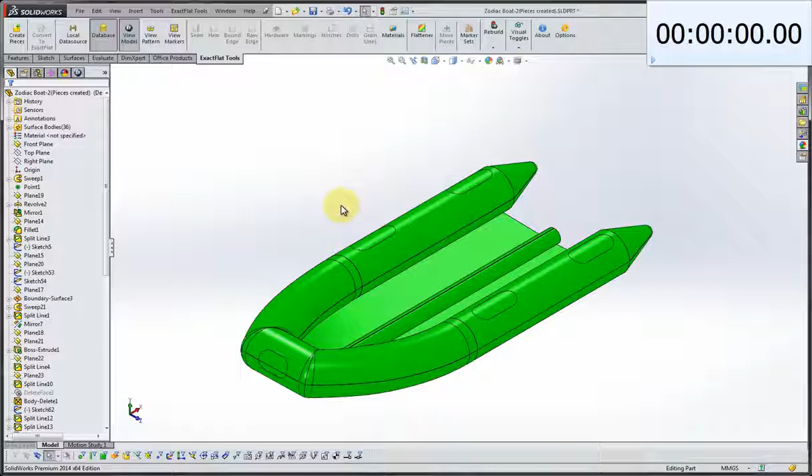In this example, we have an inflatable boat, a Zodiac type boat, which was modeled from scratch using SolidWorks 3D drawing tools that we are going to flatten in Exactflat. We've done a little bit of pre-processing work here. As you can see, we've already got our initial flat pattern, which for the developable surfaces should be fine. But we're going to go ahead through the process and optimize this.

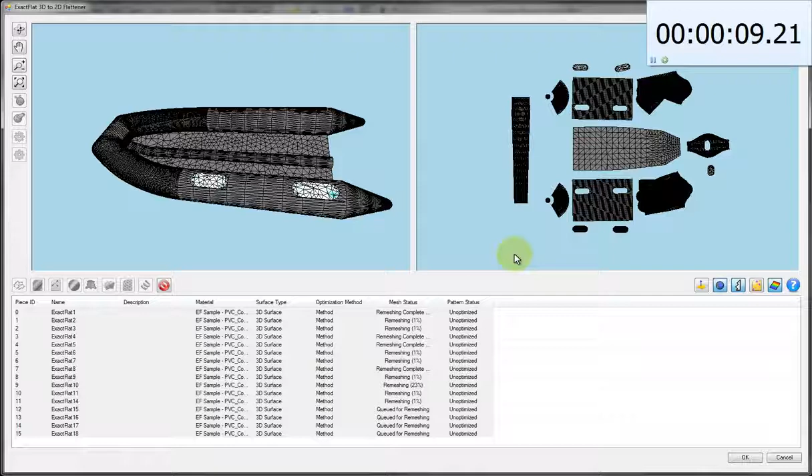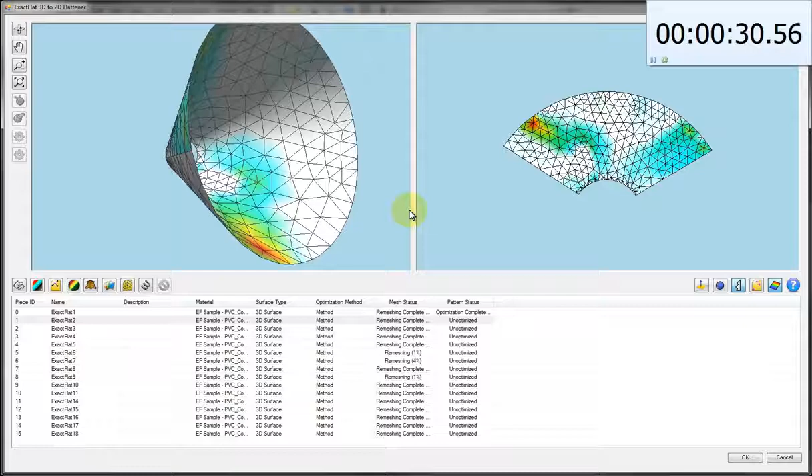We've got about 15 pieces here, and as we click on a remesher, we're going to get varying stages of completion for the meshing process. For those who are not familiar with the meshing process, the program creates an analysis mesh, which is optimized for our Exactflat 3D to 2D flattening algorithms. The meshing process is designed to reduce solve time and increase pattern accuracy.

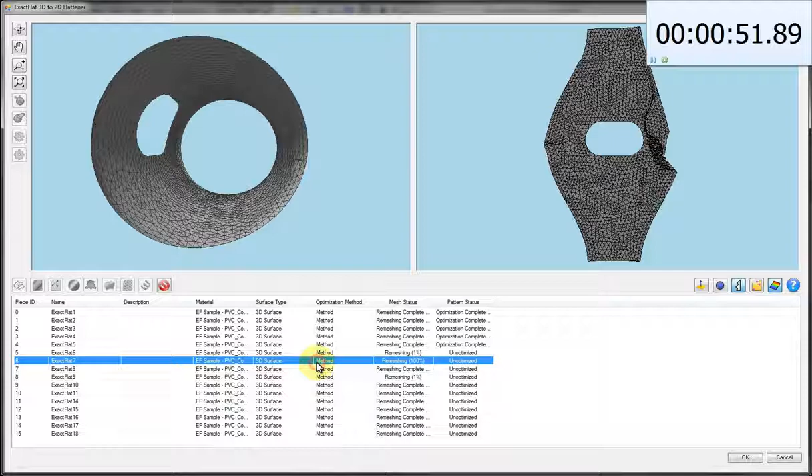You can see here that we're going to go through these individually. So as the individual pattern pieces are completed in terms of remeshing, we are then starting the optimizer on each one. We've got a couple of complicated pieces - you can see there's one that is still remeshing at a 1% level. But for those that are 100% complete, we'll just go ahead and start the optimization.

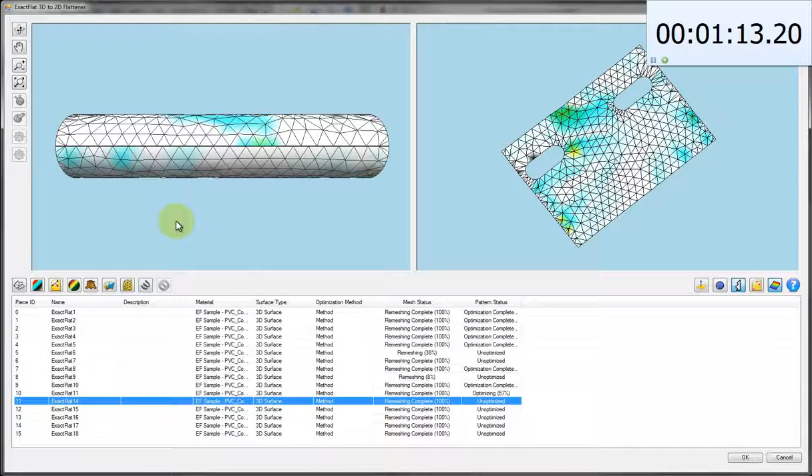You have a choice of letting the remeshing process run to completion for all the pieces and then optimizing the pattern geometry of the flattened pieces all at the same time. Or, as we're doing here, you can do it as the pieces become available from the remeshing algorithm. It depends on the complexity.

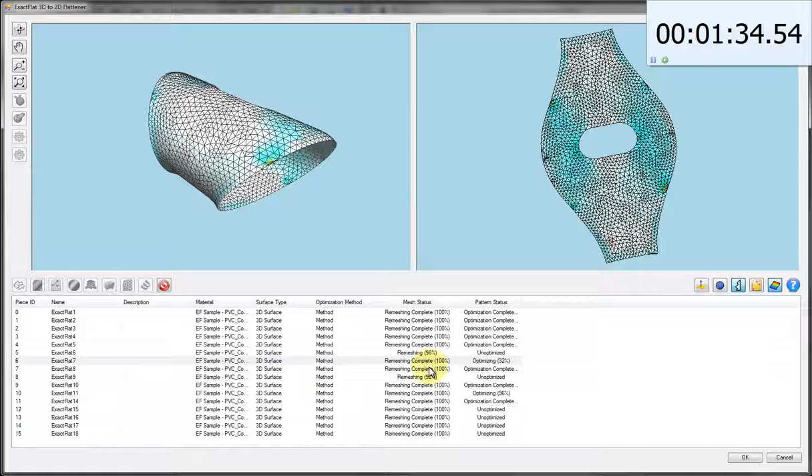You can see here this piece is a little bit more complex. It's got some strain and sag, but as we start the optimizer, it quickly eliminates those and gives us a pattern piece which is pretty close to the approximate pattern piece that we're going to have at the finish. And I think this one's going to work for a little bit longer because I do see some strain and sag that is residual in there.

But the process is pretty straightforward. Our algorithms are searching for strain and searching for sag. Where it finds sag, it's going to pinch it away, and where it finds strain, it's going to relax it. It does it by iterative optimization.

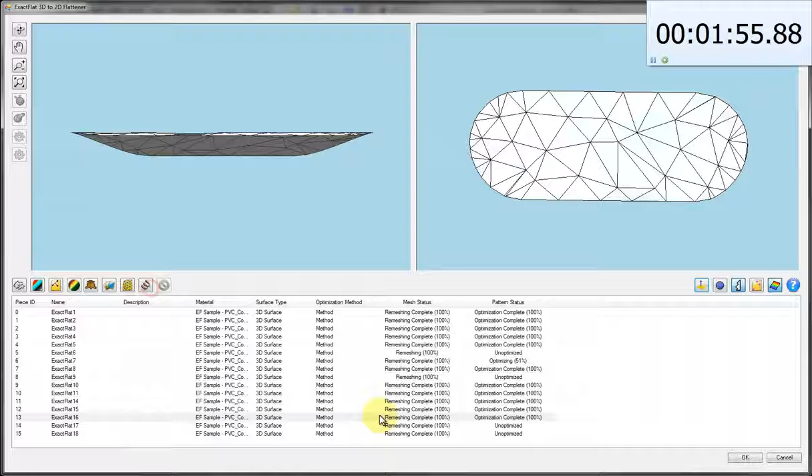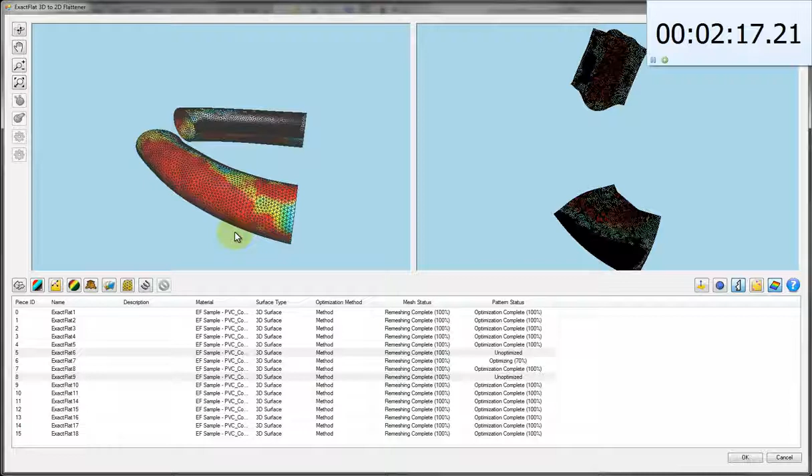So when a candidate for a flat pattern is presented, it runs the analysis algorithms on those patterns, and when it runs through, it will alter the map of strain and sag. As you can see, it's doing for this piece right here, where there's some sag around the perimeter edges and strain in the middle, and then it'll try and eliminate it, and then it will take a new candidate, which was the result for the subsequent one, and run through the process again.

Here, what we're going to use for these ones - these are a little bit more complicated geometry. You can see on the left there's quite a bit of sag and quite a bit of strain, which is to be expected on parts like this.

We're going to run a pelt algorithm, which is a pre-processing algorithm. The standard algorithm that runs, we call it fracture, just takes the polygonal mesh, breaks it apart, lays it flat, sews it up where there's gaps. The pelt algorithm literally slices it open and kind of unrolls it. It's a pre-processing algorithm that gives a different starting point, or a different initial candidate, for a flat pattern.

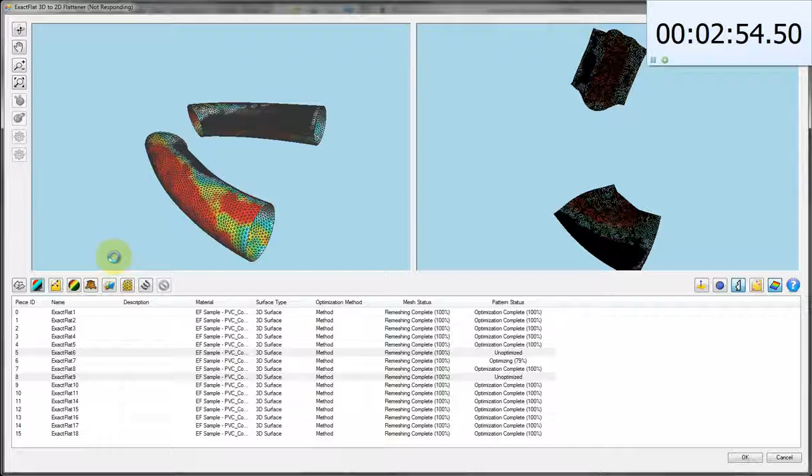You can see it kind of showed not responding there because it was doing some pretty intensive calculations. But once the pelt algorithm has completed its process, we just run our standard optimizer. And you can see it's making pretty quick work of the sag portions of this, at least. This one will need to run for a little bit longer in order to get an optimized piece.

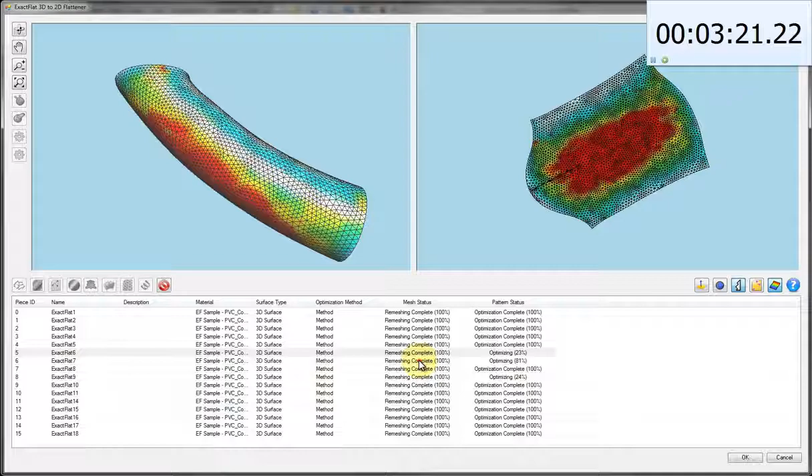We're about 23, 24% at this point. And it should take a couple of minutes or so to get to the final piece that's as strain-free as that geometry can get without making some relief cuts or darts or something like that.

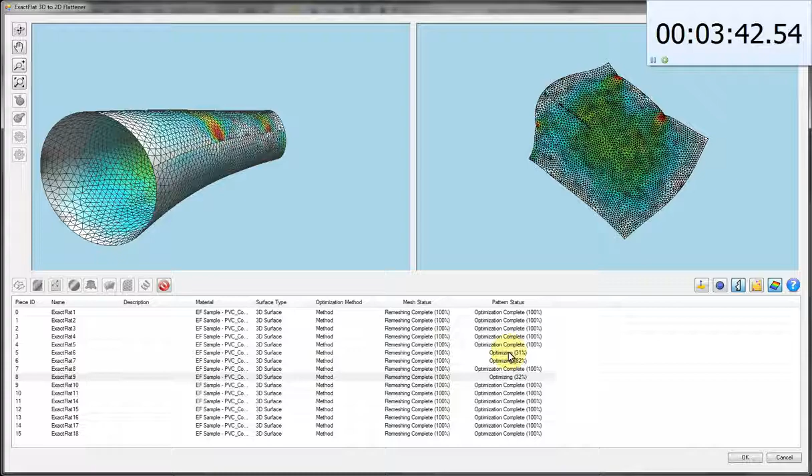So the easy pieces have already been solved, and the more difficult pieces now are in the process of being solved. This will go much faster if you have a fast computer. This computer we're doing the video demonstration on is not particularly fast - it's a 4-core Xeon processor.

If you've got 8 or 12 core machines, our algorithms do support multi-threading, so these things can be done, or the bulk of the calculations can be done simultaneously.

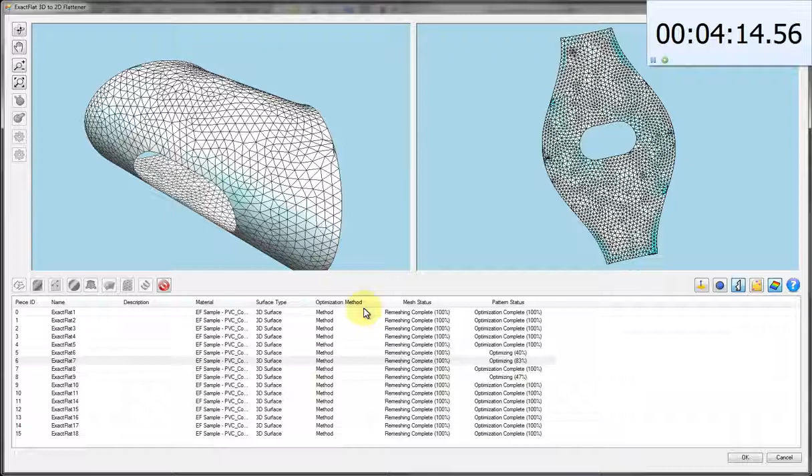And as we cycle through these pieces, you can see that we're about 4 minutes, just over 4 minutes in. We've got the bulk of the pieces done, about halfway done on the other pieces, and we'll just check in on some of these other ones here, see how they're doing. It's getting pretty close - I can see some perimeter edges that need to be sorted out with some sag and some strain.

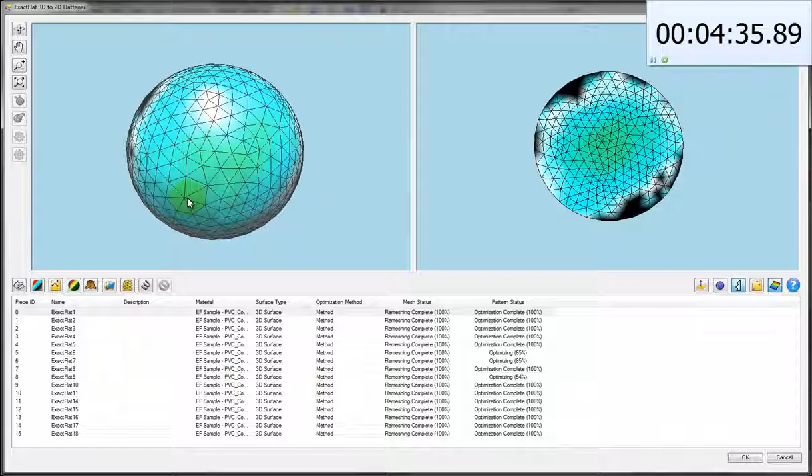We'll check in on some of the other pieces here. This particular one, you might actually have to add some relief cuts to get an optimal shape, or it might require some stretch. So for an inflatable, it may be designed to be under some tension, and therefore that's really not a problem. This piece is actually coming along quite nicely, about 91%.

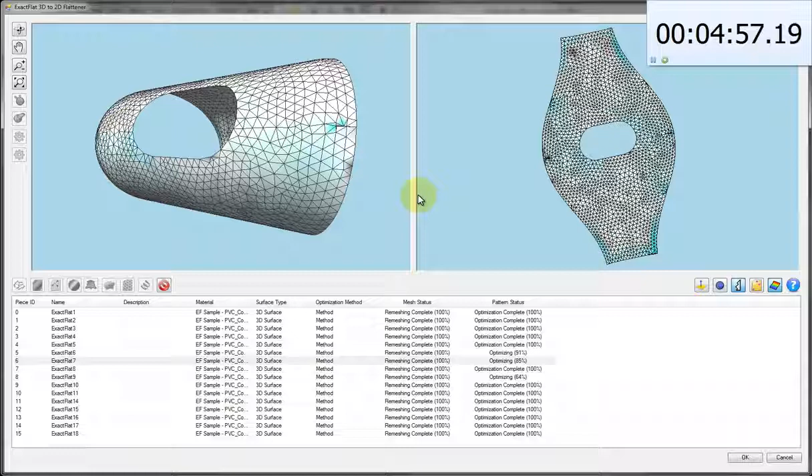And I think for the purposes of this, we may cut the solving process a little bit short - just gives you a flavor. Yeah, we'll just go ahead and stop it here. It gives you a flavor for how the more complicated geometry can be solved in conjunction with very simple geometry.

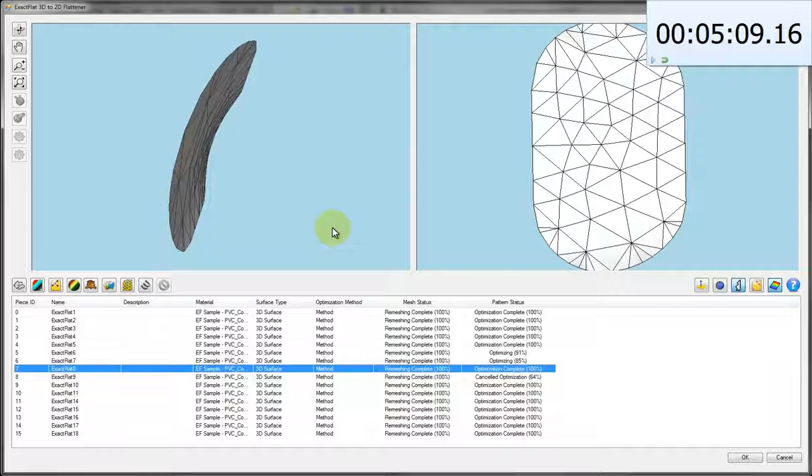Now, I will point out that all these pattern perimeter edges that are mated to other edges or adjacent pieces - those edges, the seam length has to be maintained. So there are some constraints in running this, but this gives you a flavor for how you take a product like this, and this might apply to evacuation slides, lifting devices, any sort of inflatable product out there.